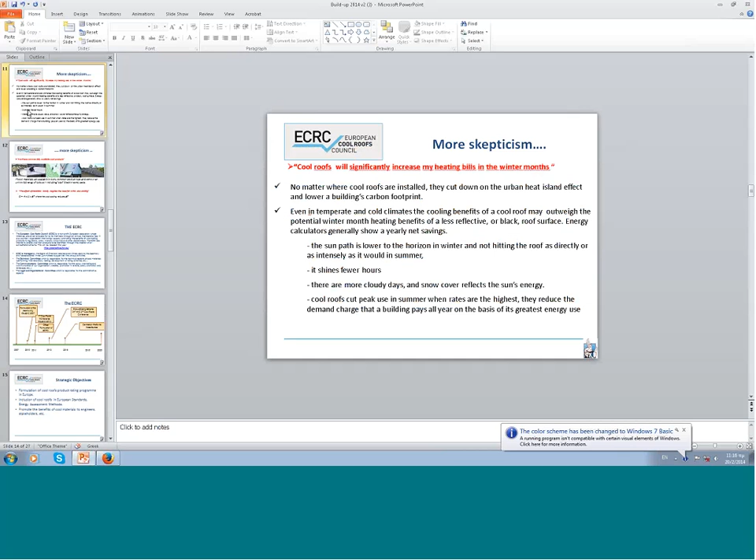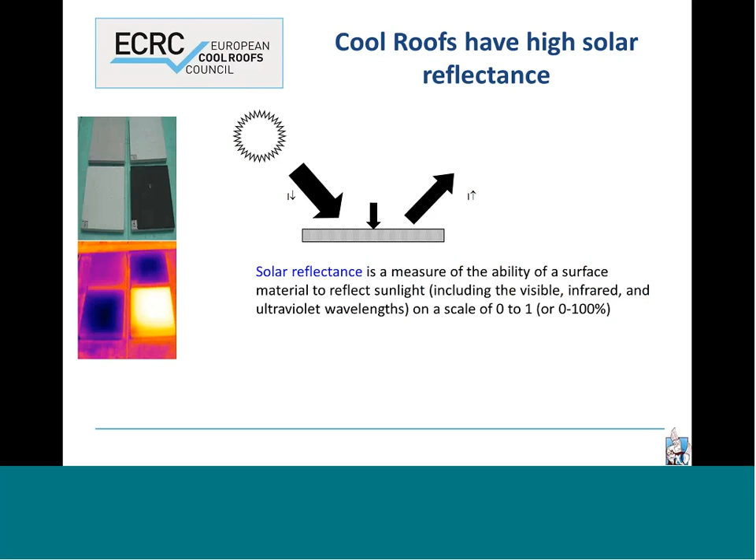As Professor Santamouris said earlier, cool roofs have two specific characteristics. The first one is their high solar reflectance. The reflectance is higher than the conventional materials, even for colored materials and even for black materials. The cool roofs have higher solar reflectance. And the second characteristic is they have higher infrared emittance.

So infrared emittance is the measure of thermal emittance of a surface that is defined as the ratio of the radiance of a given body to the black body. So these higher emissivity values or higher emittance indicate the heat transfer capability of cool roofs.

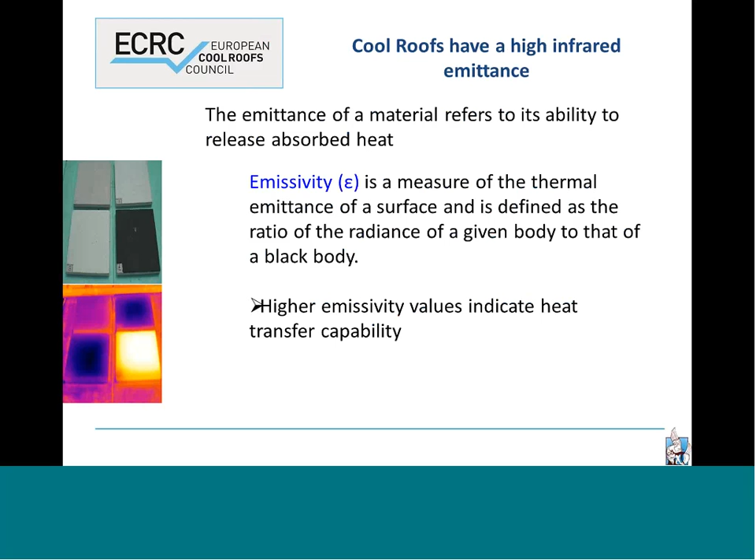Another way to measure the capability of cool roofs and their ability to stay cool is the solar reflectance index, which is an extrapolation between the standard black and the standard white. The standard black has a reflectance of 0.05 and emissivity 0.9, and the standard white has a reflectivity of 0.8.

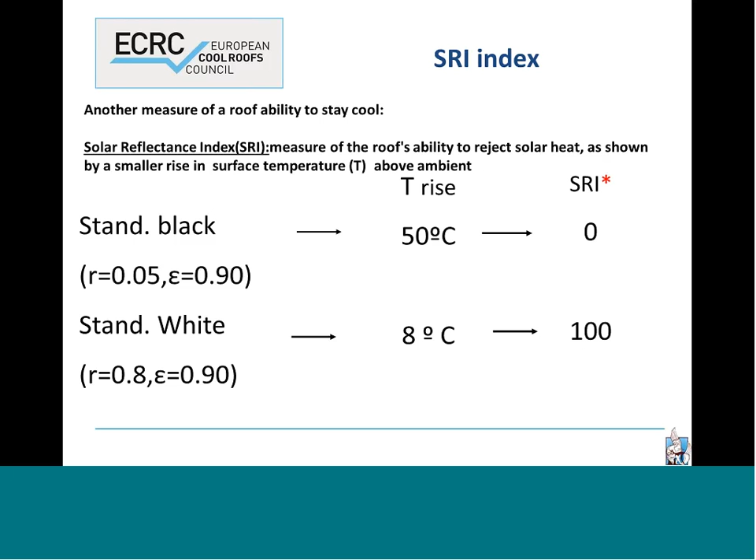So if we plot the temperature rise above ambient between the standard black and the standard white, we have the 2 points, the black and the white, between 0 and 100%. And then if we have the maximum temperature rise of a given material, we can compute the solar reflectance index by interpolating between those two values. The SRI of the cool materials are usually higher than 100%.

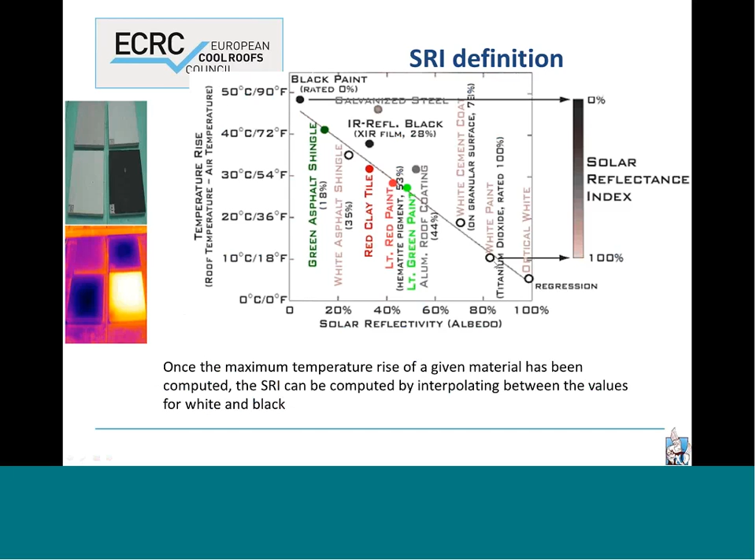So in order to summarize all this, the cool roofs have high solar reflectance, high infrared emittance, less solar radiation absorbed, faster release of the heat, so they result in lower surface temperature, so less heat penetrates into the building and less heat is transferred to the ambient air. Therefore, they contribute to the reduction of the peak energy, the reduction of the overall energy for cooling, and also to the mitigation of the urban heat island.

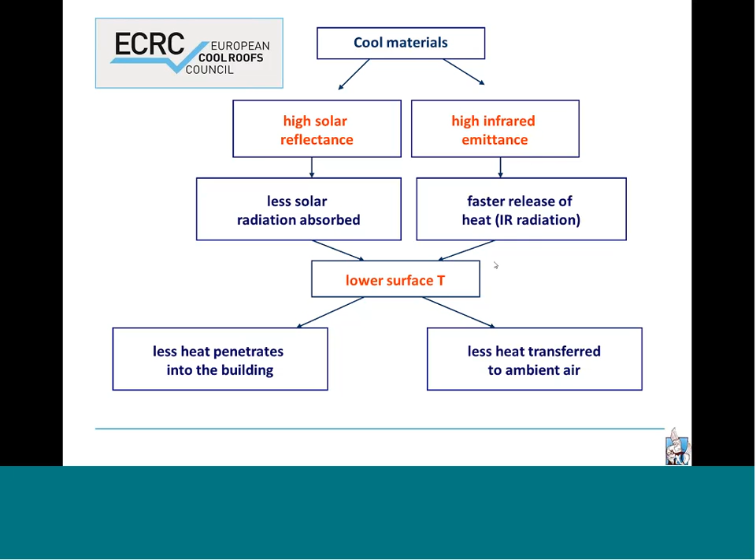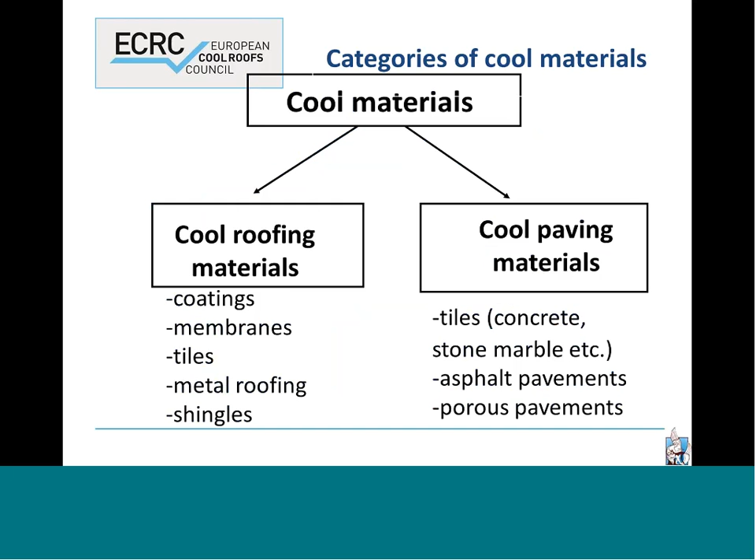Some people will ask how many cool materials we'll find, because there are different types of roofs. We have cool materials for coatings, membranes, tiles, metal roof shingles, concrete, stone, marble, asphalt, and pavements for cool paving materials. And those will be also discussed in the next presentation by Rebecca Tonkin.

So what are the benefits of cool roofs? First of all is the reduction of building heat gain. Since the temperature of the cool roof increases only a few degrees above the ambient temperature, we have a reduction of the heat gain. And the savings of air-conditioned buildings can average between 10 to 40%, and they are more important for hot climatic conditions if we have buildings with a low level of insulation,

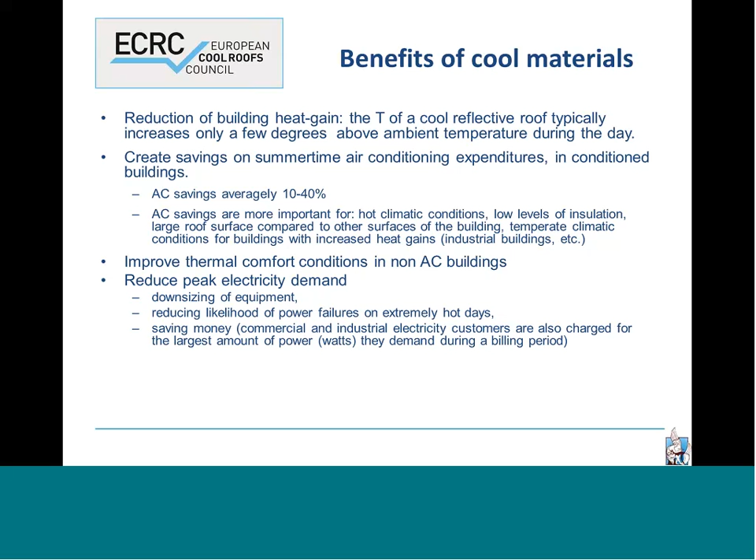larger roof compared to the other surfaces of the building, and buildings that are in cold and temperate climates but have increased heat gains. We have some measurements in industrial buildings with increased heat gains where the cool roofs are very beneficial. For the non-air-conditioned buildings, they improve the thermal comfort, and of course they reduce the peak electricity demand, which reduces the likelihood of power failures, especially on extremely hot days, and reduces the power costs.

Other benefits are that they also reduce heat-related air pollution, less carbon emissions, of course, and indirect reductions, because if the heat island is reduced, the smog formation is reduced, as the smog reaction depends on the temperature of the ambient air.

If we consider that the energy efficiency that can be attributed to a cool roof ranges between 2.5 to 10 kilowatt hours per square meter, we have an average energy efficiency for a cool roof surface of 6.25 kilowatt hours per square meter. These savings can be sufficiently large in most countries to provide incentives to keep the cool roof permanently, to provide incentives to promote cool roofs.

And also, if we assume that you have an emission rate of 750 grams of CO2 per kilowatt hour of electricity, the annual CO2 savings can range between 2 to 7.5 kilograms per square meter of roof area, with an average of almost 5 kilograms per square meter.

Also, if we increase the solar reflectance by 40% of a roof area, if we have a concrete roof area and then we have a cool roof area of almost 100 square meters, we have an offset of CO2 emission of 10 tons. This is worth $250.

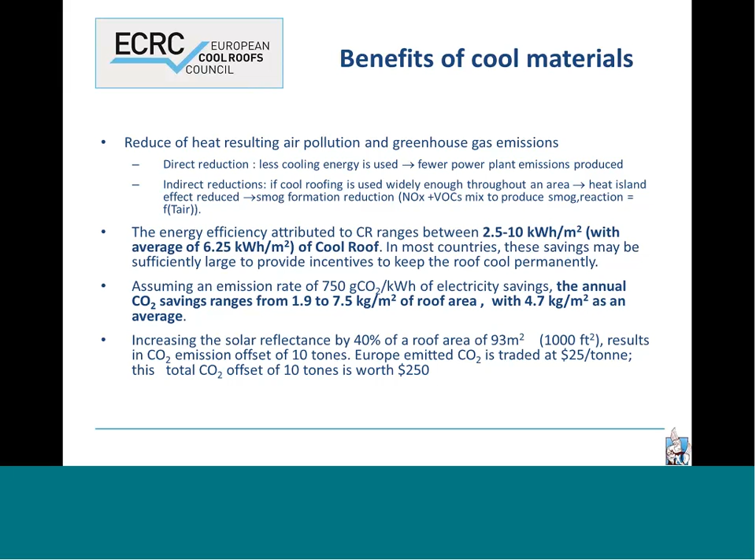Of course, there are not only benefits, there is skepticism related to cool materials or cool roofs, especially related to the fact that they are now entering the market. The first one is that everybody thinks that cool materials are white materials, and the first skepticism is that we cannot paint the cities white because we have glare problems and we have aesthetic preferences, especially for steep slope roofs. Of course, there are cool materials that are not white. This was also mentioned in the previous presentation.

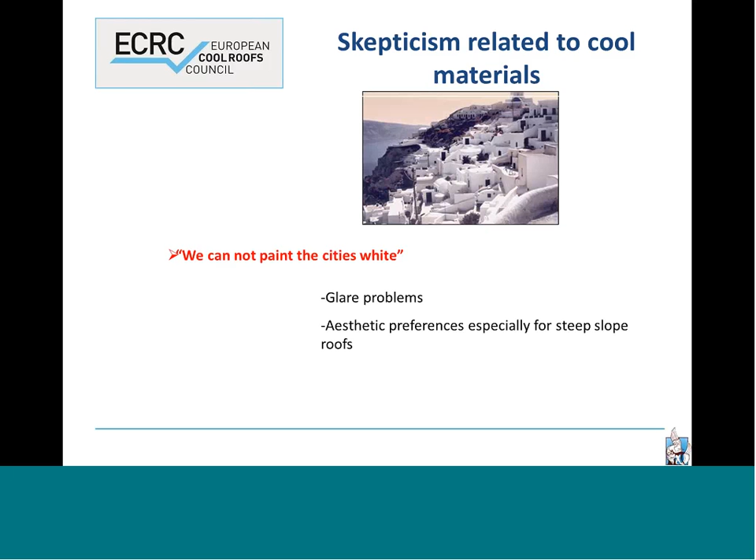More skepticism is that cool roofs will significantly increase my heating bills in the winter months. This is also not true because cool roofs cut down the urban heat island effect and lower the building carbon footprint, and also sometimes in temperate and cold climates, the cooling benefits of cool roofs may outweigh the potential heating benefits of a less reflective or black roof surface.

This is due to the fact that the sun path is lower to the horizon in winter, so it does not hit the roof as directly, as intensively as it would in summer. We have fewer hours of sunshine, there are more cloudy days, and also we have some snow cover on the roof, and cool roofs cut the peak electricity in summer, which sometimes is higher than the heating demands.

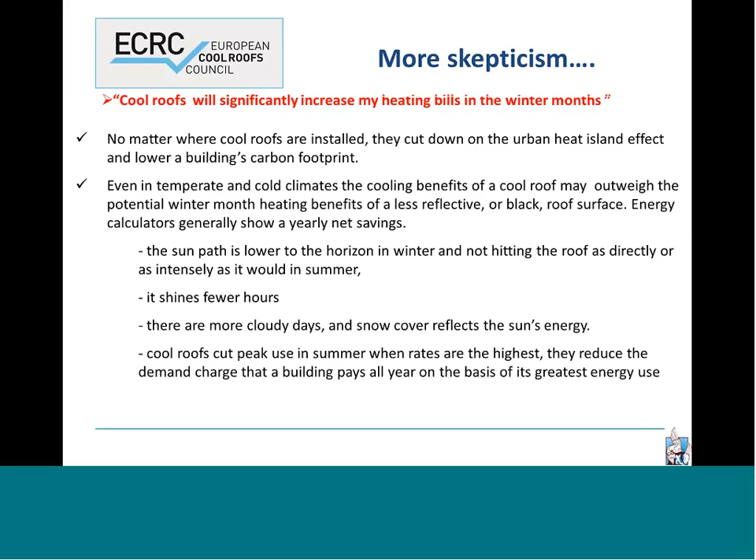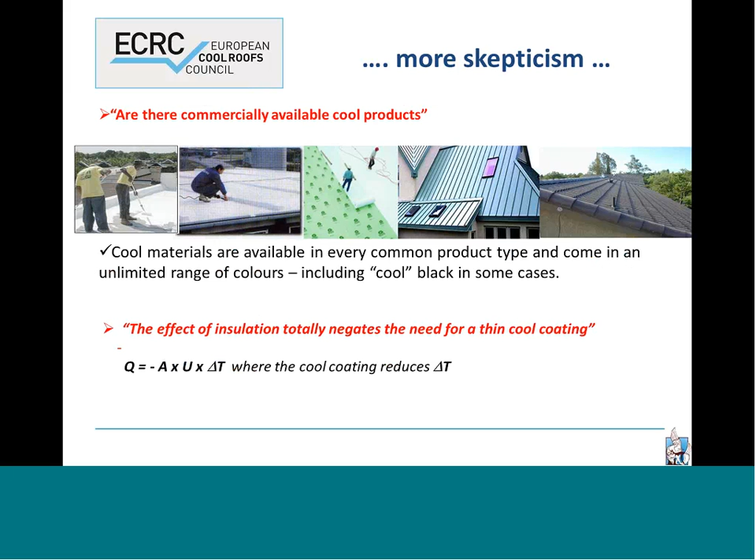Another is the fact that people think that there are no commercially available cool products. This is also not true because they are available in every common product type and come in an unlimited range of colors, as you will also see in the next presentation by Rebecca. And another is that insulation totally negates the need for a thin cool coating, but as a matter of fact, the cool coating reduces the delta T while the insulation reduces the U value of the building.

Based on that, we created the European Cool Roofs Council, which is a non-profit organization which is driven and paid for by its members through an annual membership fee. And the main scope of this organization is to bring together the market, the scientists, the industrial partners and also the stakeholders to promote the cool roof benefits in Europe.

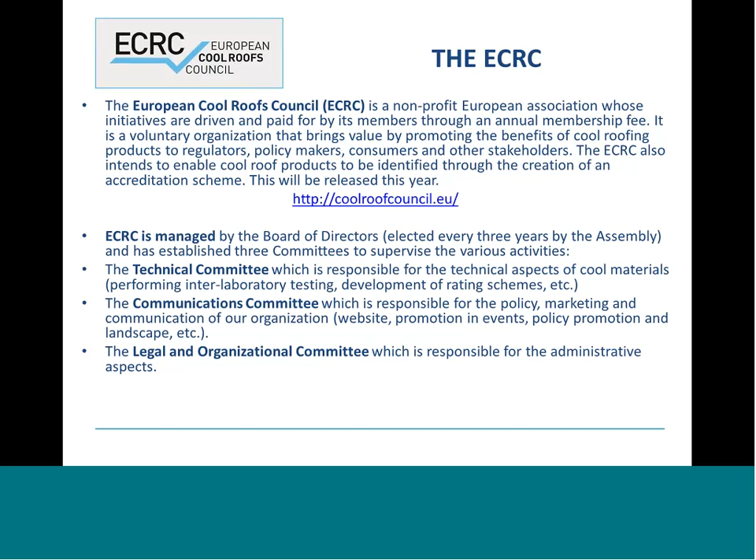The ECRC is managed by the board of directors. It has 3 committees: the technical committee, which is responsible for the technical aspects of cool roofs; the communications committee, which is responsible for the policy, marketing and communication of our organization; and the legal and organizational committee, which is responsible for the administrative aspects of the organization.

The overall idea was formulated in 2007, when we had a conference and we met with the U.S. colleagues of the Cool Roof Rating Council of the U.S., and we started to formulate the idea of the creation of the European Cool Roofs Council. We had the first Cool Roofs conference in 2010, and the official formation of the European Cool Roofs Council in 2011. The organization has been running for 2 years.

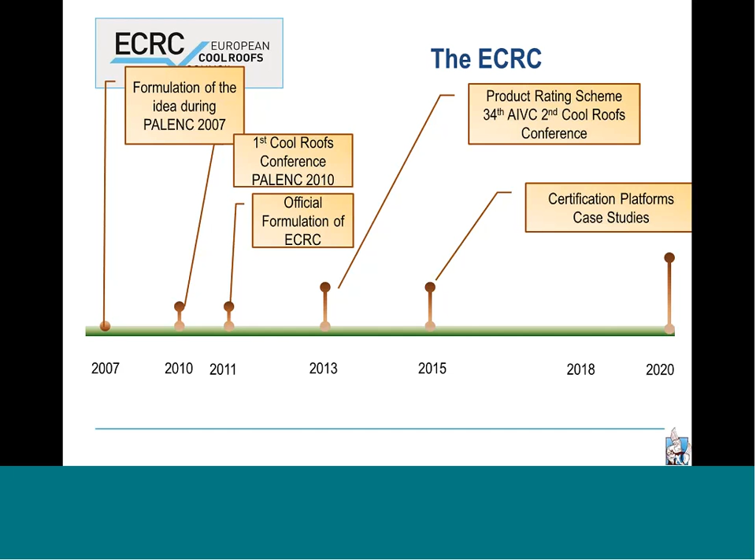Now, in 2013, we created the product rating scheme, the way and the procedures that we're going to follow to rate cool roofs in Europe. And we have also participated in the second Cool Roofs conference. And we are planning to put cool roofs in certification platforms and create as many case studies as possible to promote the benefits of cool roofs and remove the skepticism.

So as I said, the formulation of the cool roof product rating program is one of the strategic objectives that was fulfilled during the previous year. Now we are working to include cool roofs in European standards and energy assessment methods and promote the benefits of cool materials to engineers, stakeholders, etc.